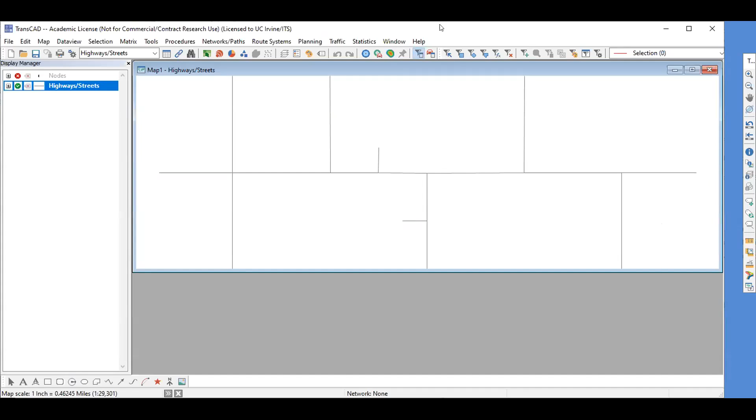Make a backup, click OK, and make the backup wherever you work on. Usually you won't actually use your backup. Excuse me? Yep. I have a question. When I try to open the file, it asks me if I want to make a backup archive and then update this database, or update the database now without a backup archive. So which one is it? Do I make a backup? Yeah, make a backup. I mean, most of the time you won't use it actually, because if you choose a backup and you're lost before you save, your backup still isn't saving anything.

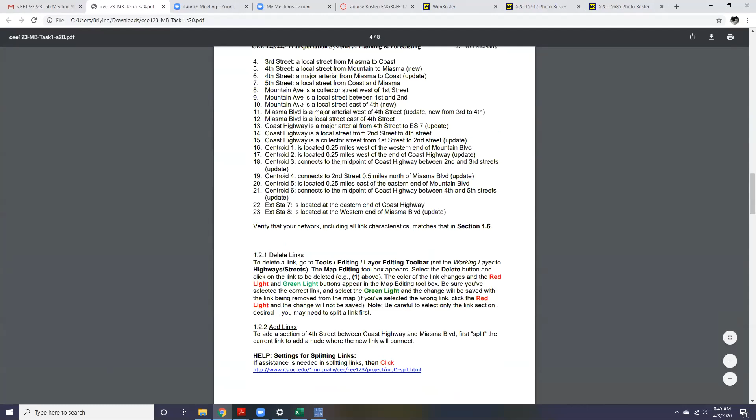Okay, so whatever I'm talking about, you can actually find it in the email I sent you yesterday. Here, sorry. So the email I sent you guys has those things to download. And for this task 1 S20, you should be able to see very detailed steps on how to use TransCAD, step by step, very clear. For this part, modify network, if you watch the video first and then do them very meticulously step by step, you should be able to find this map at the very end.

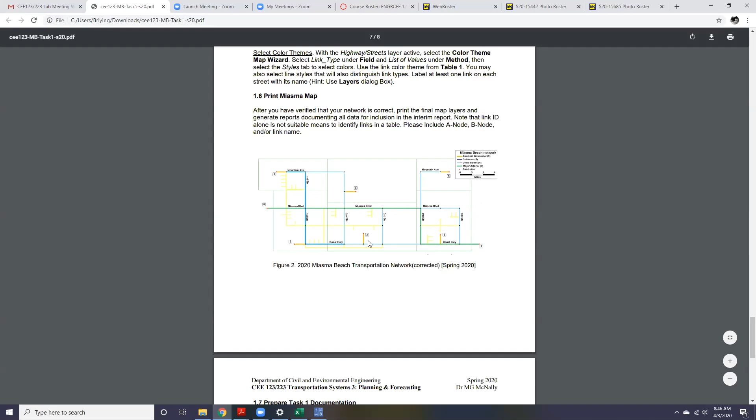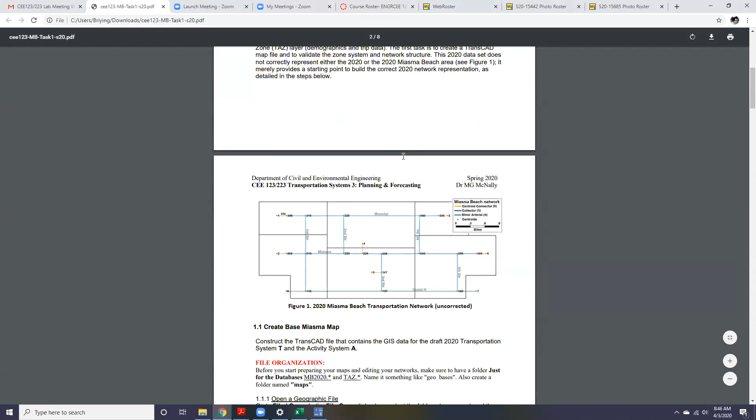Ignore the yellow link here. That's what the Professor added to make it more realistic, but the light yellow link we don't really need for this project. Okay, so we go back here and we can look at what the file says. What we did was open Miasma Beach. Oh, this should be 2010 right now because we didn't change it yet. Professor did that. Okay. And then we keep going.

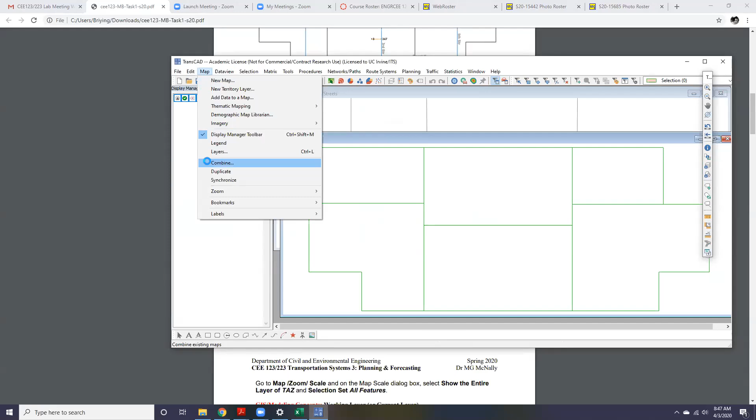We go File, we go Open, and we go to the TAZ layer. We make sure we open the DBD file, which is this one. We click Open, and you have two windows open right now. And then you need to combine those. So network and TAZ in this class always work together. I will explain later, or actually the professor's lecture should explain that. You click combine and you automatically see these two layers already here. You click OK, and they create another map for you.

See that, map 1, map 2, map 3. So you don't need the other separately opened ones anymore. Close them, close them on time. Make your screen clear every time. Remember that, or it's going to be a mess later on. So you have this map for your start already. And then what you do is save it as Miasma Beach 2020. That's actually Miasma Beach 2020. Before was the wrong network. This is 2010 now.

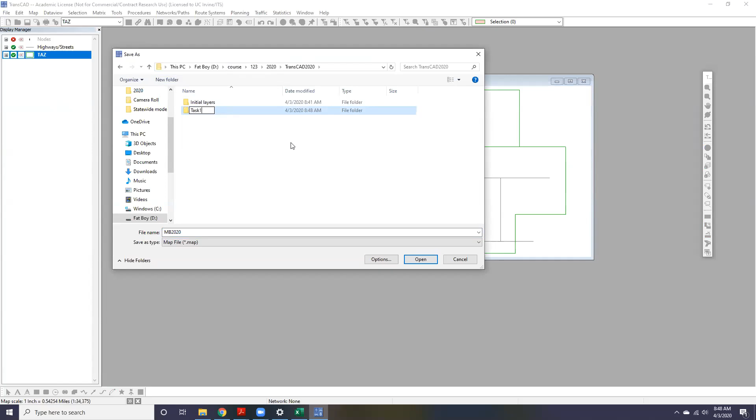So make sure you save it. Oh, sorry, my mistake. Make sure you save it in the folder you created. So this is task 1. You save it here. You click save. And when you close TransCAD, make sure you go back here.

And you need to go to initial layers and copy this to folder. Put it into task 1, which only has a map now. And later on, you copy the whole folder to task 2, task 3, task 4, task 5, and 6.

You don't have to do it because if you opened your map and didn't save it correctly, your work is still lost, or every map, every database you have here will automatically change. So it doesn't really matter for task 1 through 5, but it matters for task 6. So when you guys start to work on task 6, I will talk about it again.

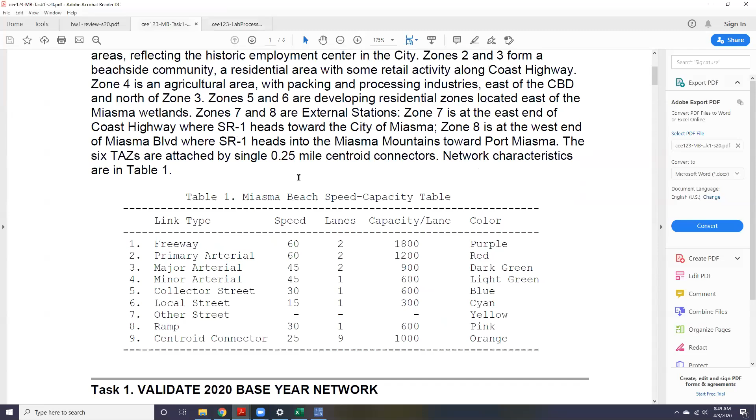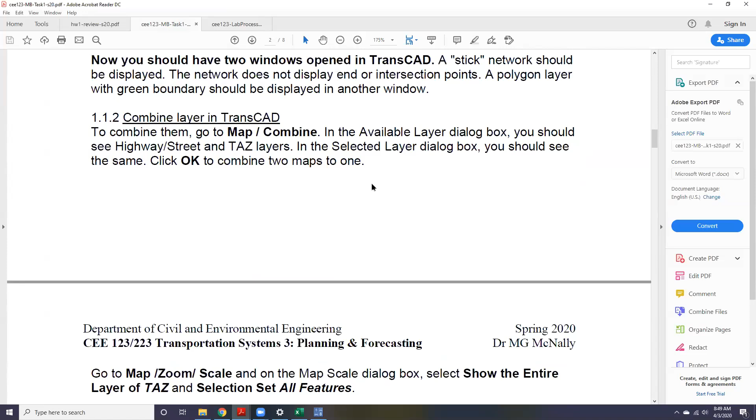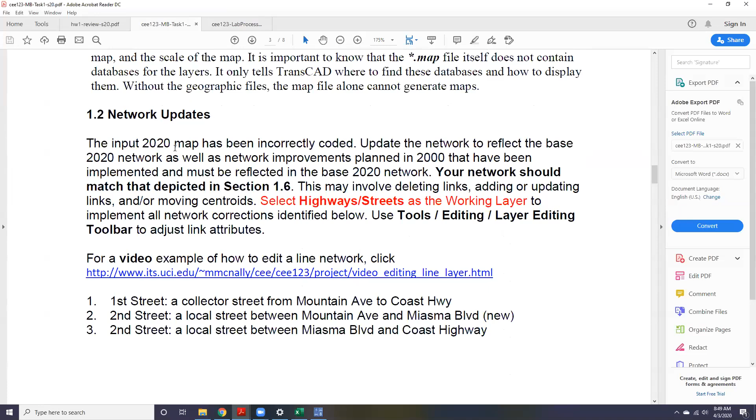So let's see what's happening in this task. So we are here. So we combine the layer and we have our first map now. Okay, so we're here. So now what we need to do for this week and next week, I hope you guys can finish it in this week, but that's quite a lot of work to do, is network updates.

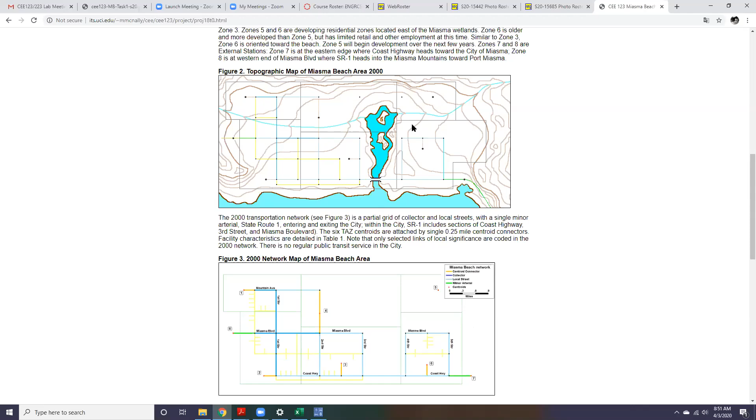And this is the topographic map for Miasma Beach. And we can see there is one natural area that is important for whatever you have in your alternative later, especially when you calculate the cost. So that means if you put a link across this place, it's tricky. If you actually did it, the cost calculation will be different, so that you know it.

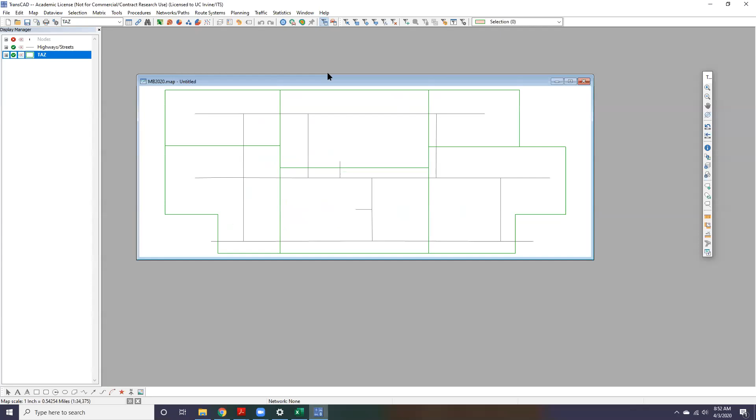And then there is the initial map for 2000. We are kind of making the change from here to the future. But actually the network provided for us is not exactly the same. You can see, let's see my TransCAD here. So if you open the professor's website, like what I did there, you can see the difference. Here is already a link, which is not right for even this project. So there's a lot of modification you need to do.

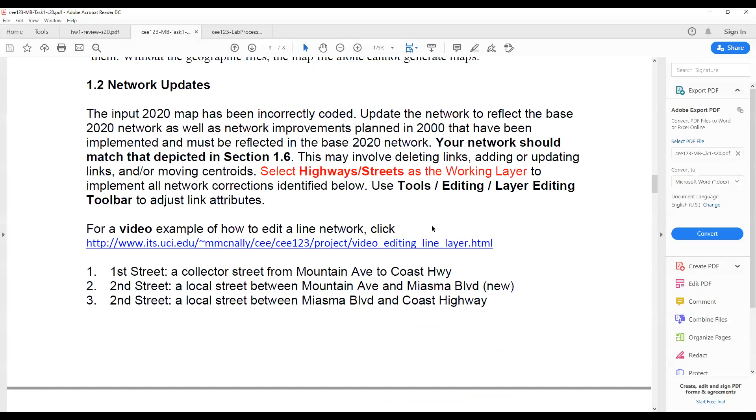So let's go back there. Miasma Beach project. You will see this table, little table, which is the same as this file I gave you at the very beginning here. You can see this table. So we called it speed capacity table, but it actually has more information. This is a link type. This is a lane number.

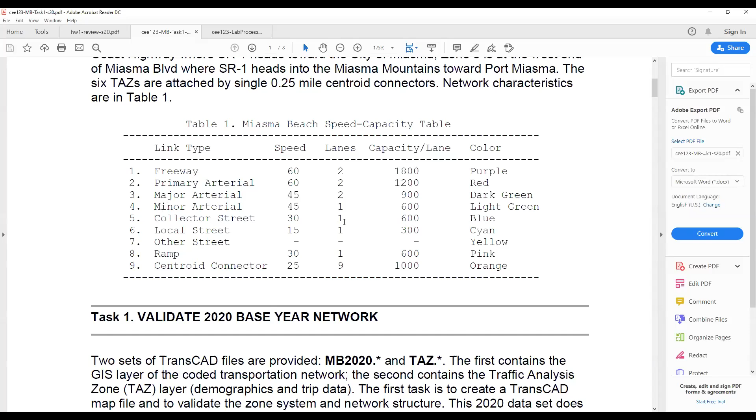So capacity per lane is not going to be the total capacity for a certain link. The lane number times capacity should be the total capacity for a link. We'll use it later on. Your definition of the link type is very important for your project. When I say you change some link to collector street, let's say that, that means you need to change your speed, your lane number, your capacity all together.

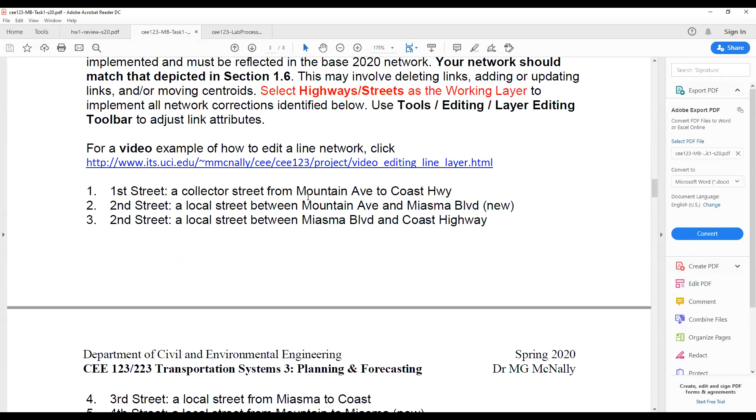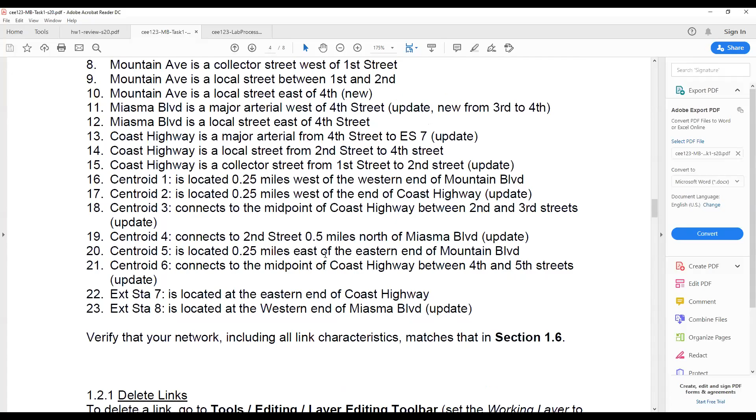Okay. So now we focus on TransCAD. The first thing you need to do is activate the node layer. So you can see when I push this button, you can see some very light gray dots displayed on the map now, right? That's because this layer is now active. So to make it clear, click.

Would you mind if we record this part that you're showing us on TransCAD? No, I don't mind. Do you have that option? It says I need permission. Okay, let me see.

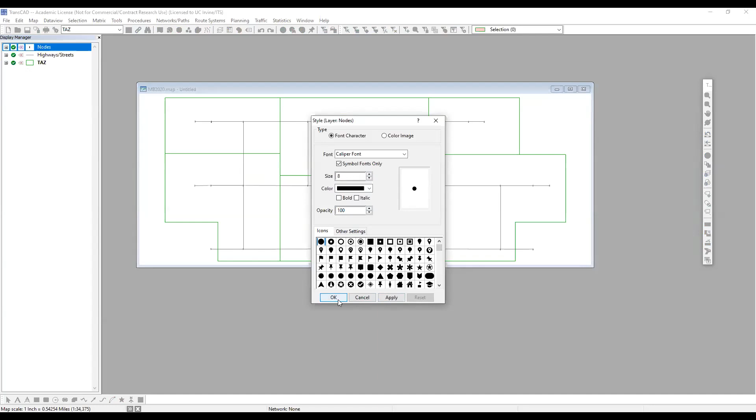Here. So you want to make a node larger. Click this little figure here. You can change a highway. You can change a street. And if you click here, you can change the TAZ layer. So same way, you change node, you make it color black, you make it larger. Make sure you use dot. I mean, you can use others, doesn't matter, but I would always say dot for node is better. Here, very big.

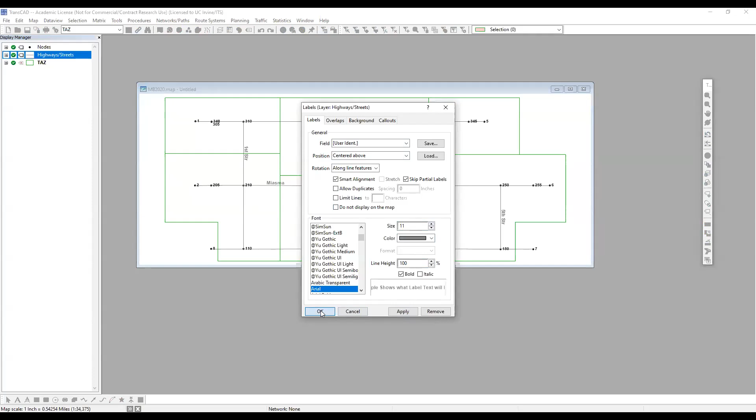Okay, it's clear. So now we can also label it. This is this little button here. You can go to ID, apply. So now you can label also street. We want street name because Professor Phil is talking about the street name every time. Apply. Make it clear. Okay, that's how you do it. Any question? Okay.

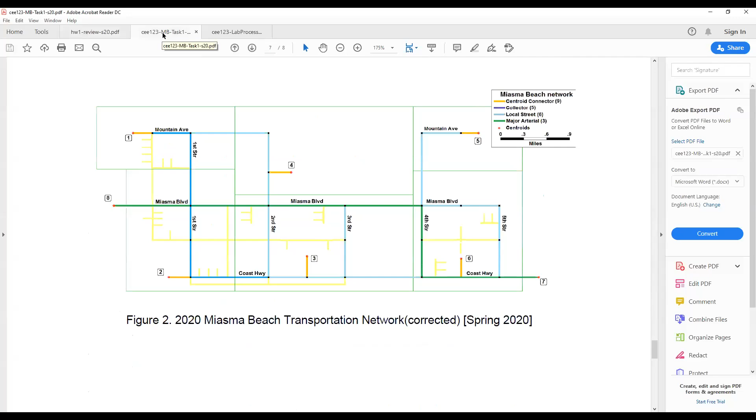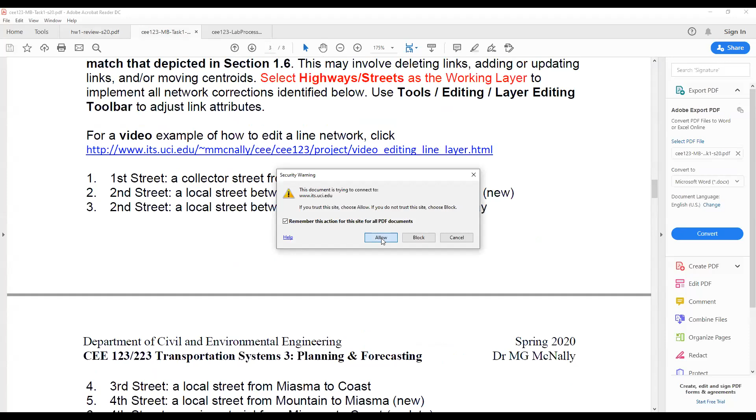Okay, so now we can go back to see what the professor wants here. Wait. Let's go back. So feel free to use the link. This is actually very useful. If you watch the video, he will show you again and again as much as you want about how to change link node. You can see that anytime you want. So right now I'm gonna show you how to modify those links.

So go to the right layer because we're modifying network, not TAZ layer, not node. So right now you go to the working layer, highway and street. And then you go to tools, editing, edit a layer. What is that? I don't know. Layer editing toolbar. This is pickup link. This is add link.

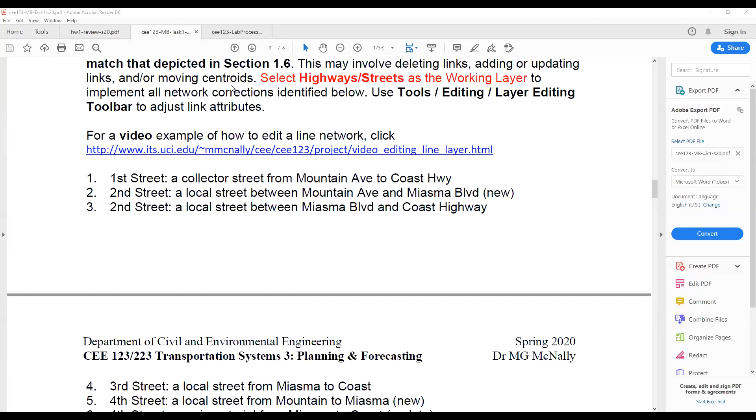We can't see what you're doing. All we see is the PDF file. Oh, okay. Sorry. Can you see it now?

Yes. Okay, cool. So now this button is to modify link, but it's not very accurate. This is the one you pick up link. This is add link. This is delete line, join links, split links, and those about the information. I'll show you how to use each one.

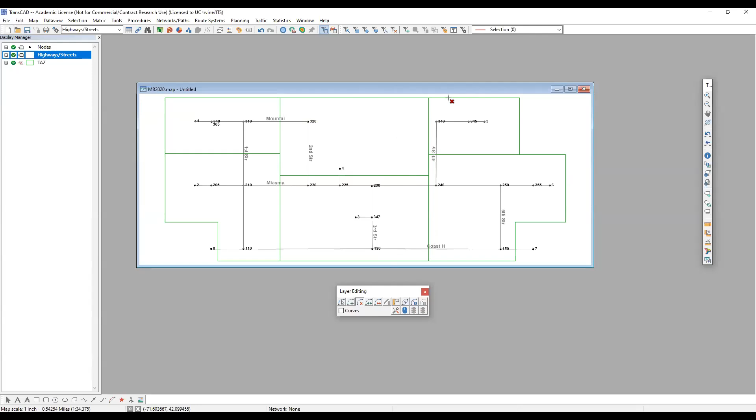So first of all, we all know this link didn't exist in the final map, right? So we pick up this link. We want to delete it. Select it first. Click on the link when it's turned red. Click this green button. Sorry. Okay, so let's do it again. Pick up this link. What we want to do is delete the link. It's turned red. Click the green button. It's disappeared. See that? That's one.

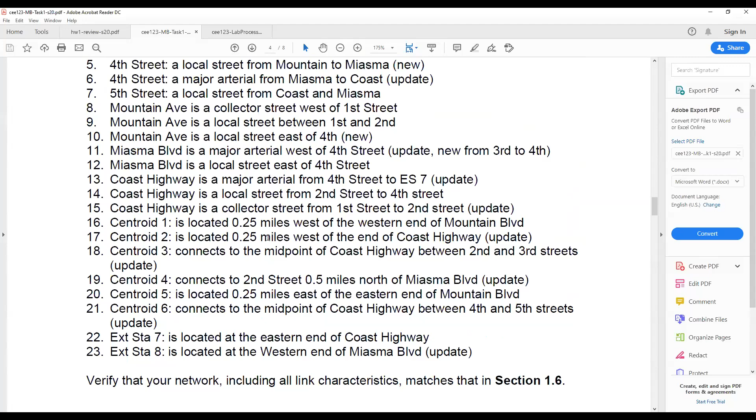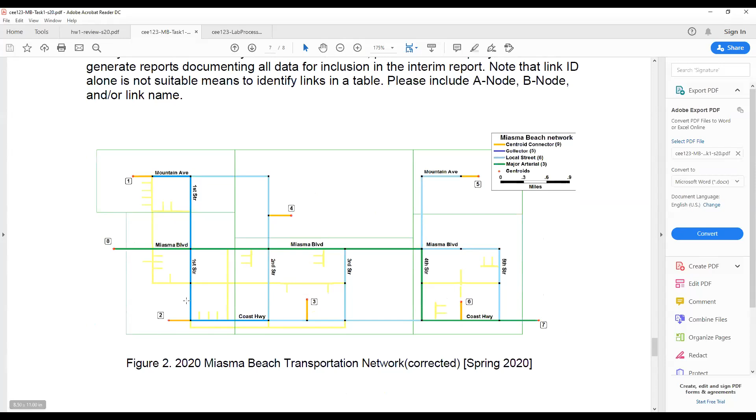So we can also see, hey, is my screen sharing paused? Okay, let's see this. So let's see, Centroid 1 is located where we were, and Centroid 2 is an update. So we can see final map says Centroid 2 is here. And in your TransCAD right now, your centroid 2 is here. So you want to move centroid 2 to this spot, and right now it's centroid 8.

So moving centroids is very, very different in this lab work, in TransCAD or wherever you're going to work in the future if it's related to centroid moving. Because centroid was given by TransCAD, it's already given by node. The node number will change automatically out of your control if you delete a node and add a node. However, for centroid, we need it to stay with the centroid number.

So we don't want to, like, if I connect those two and move something, you will lose this number 2. So what we need to do is move this centroid from there to here. And then we connect them by this add link from here to here.

And you will still have this link right here, but right now you can push enter. See, if you do that, you push enter, otherwise your node will drop somewhere else. So now we use cancel edit. The whole thing you made here is all canceled together. So let's do it again.

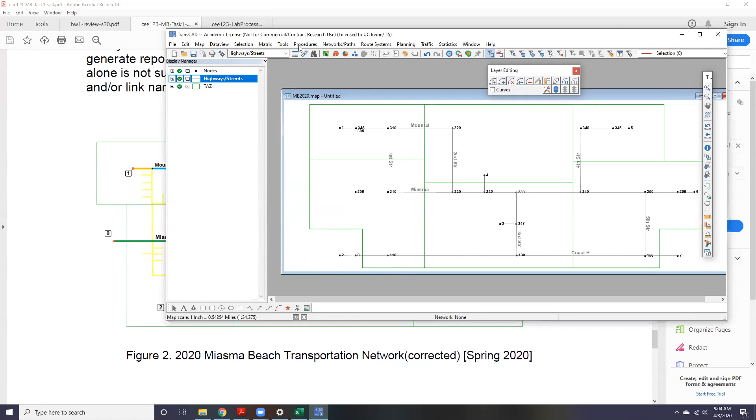So now we don't need 2 and 205 connected. Right now we do the same thing to delete the link. We pick it, choose delete link, click it, and click green. So now you have 2, 8. You have centroid 2 moved down here. And you can see 2 is connected with the whole network with this orange link.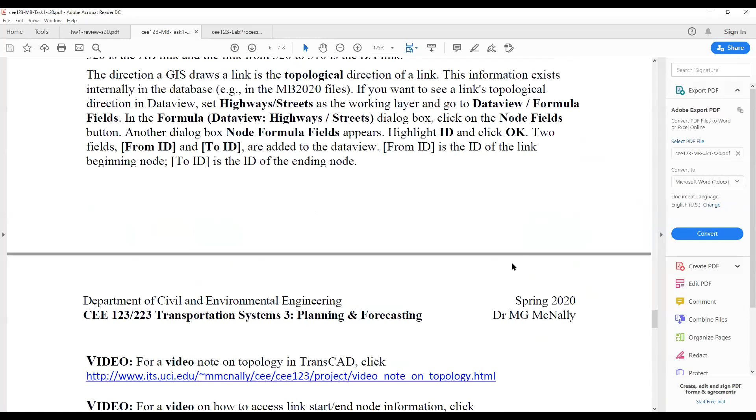What is the orange link? You should go back to the file at the very beginning I just showed you. Okay, here. What is orange? Centroid connector. Did anybody remember what the Professor talked about centroid connectors? He mentioned it very briefly. So a centroid connector is not real. A centroid connector is an imaginary link. You can see.

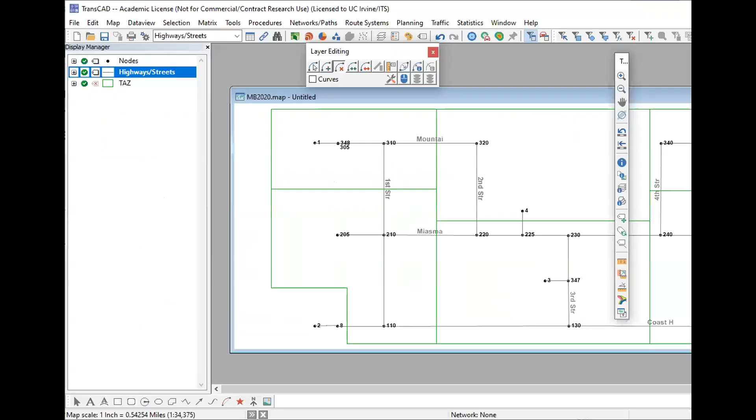If you delete the link wrongly, sometimes it lets you recover, sometimes it doesn't. So you go to edit, and if it allows you to undo, you can do it. Sometimes it just doesn't work, I don't know why. If you click undo, it's gonna ask you, do you really want to do it? You click yes. So that's how you do it. And you can also redo like this.

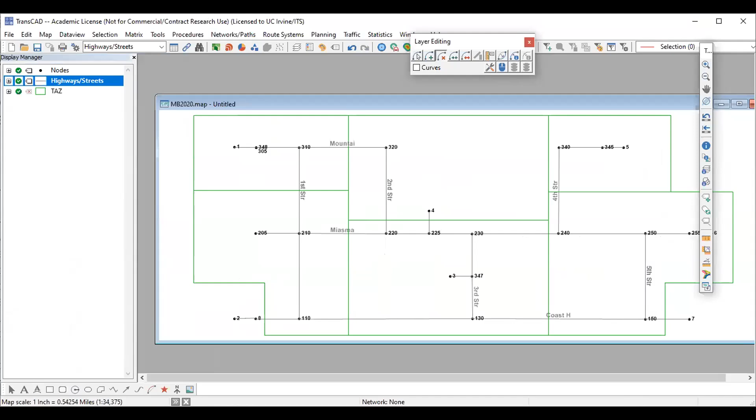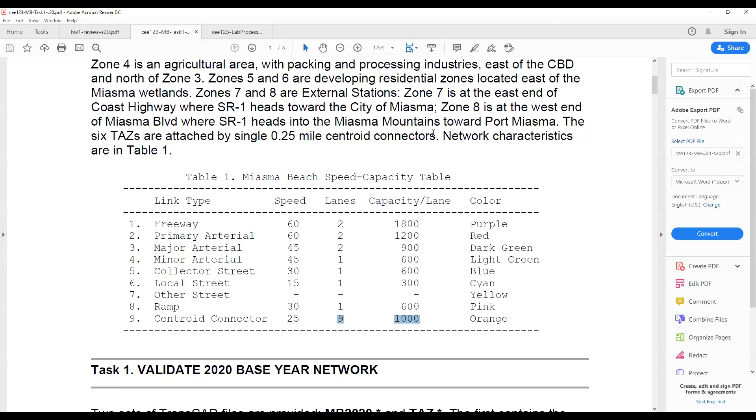Where was I? Here. Centroid connector. It's not a real link. The capacity and the lane number together give 9,000 capacity. So you know why it's not real, right? Why we need it is because when we have a network and we have TAZ numbers, the system will not know automatically which node represents which TAZ number. You need to make them match.

You need to connect the TAZ layer and the network layer, which also means you need to load your TAZ's travel demand to the network, and you need a connection between them. So that's why centroid links exist. They connect the TAZ, which is this 2, to the whole network. Is that clear?

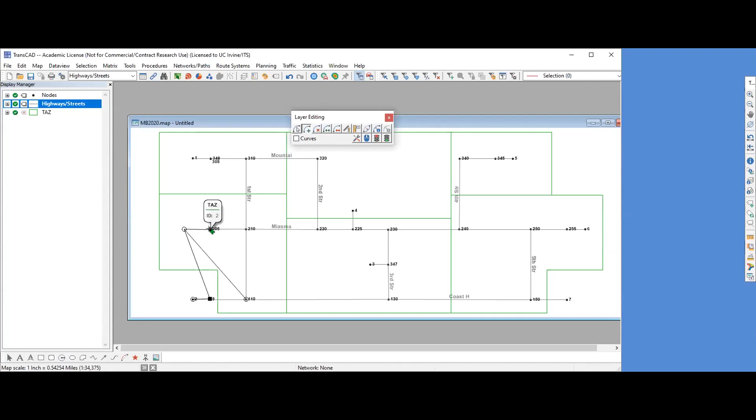So let's finish our work here. We see 2, 8, 110. And in this network, 8 is here, 2 is here. So what you do is you move 8 there, and you connect 8 with 205. You click enter, and you save it. So now 2 is here, 8 is there.

Well, actually, you can do 8 first. That would be smarter than what I did. And then you can connect 2 with 110. And you just delete all the links you don't want. And you can also make it shorter, make this longer, just as you desire.

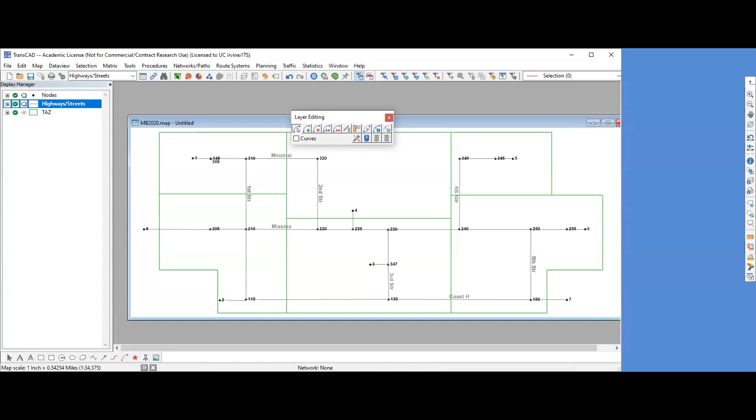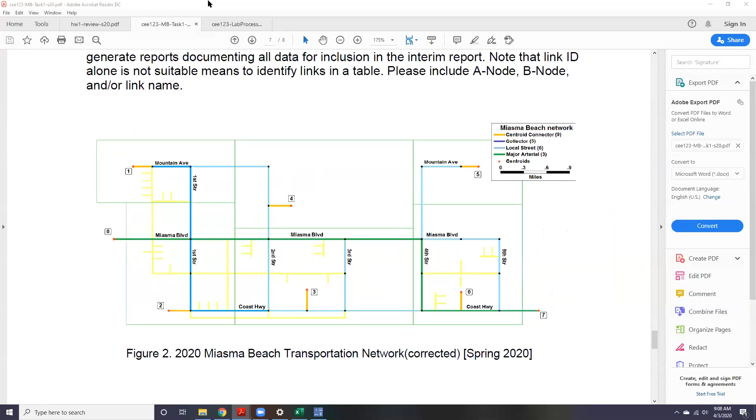So let's go back to that map again. You see 8 sticks out, 7 sticks out, 2 is inside. Remember what we saw in the prior study? In the prior study website, where's my website? Here. Are you guys seeing the prior study now? I assume you are. Okay. Prior study, you can see this one, this one.

These are outside. So this link and this link are external locations. They are different from all the locations inside the study area. They connect trips from outside of Miasma Beach to get into Miasma Beach, and from Miasma Beach to go out of the study area. This also includes trips from outside to outside. So you will have 3 parts for external trips, all linked by these external locations. You will see later in this project.

Okay, so now let's go back to this PDF, which has the final map. I've showed you how to use those tools. You should be able to do it step by step to make your map look exactly like the final map. Link modifying. Okay, I'll show you how to change the link attributes. So let's stop the editing here, and we need to go back to... Can you minimize the PDF again, please?

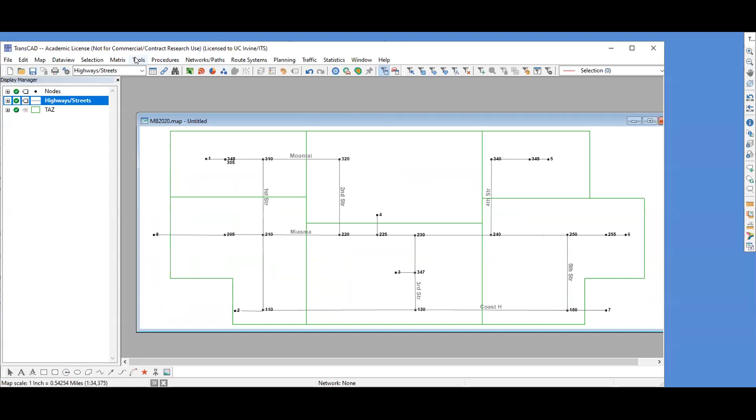Oh, sorry. So, in TransCAD, okay, so what I did was I just closed the layer editing. I closed it, that's all I did. Any question? How did you add the street names and the numbers for the nodes and stuff?

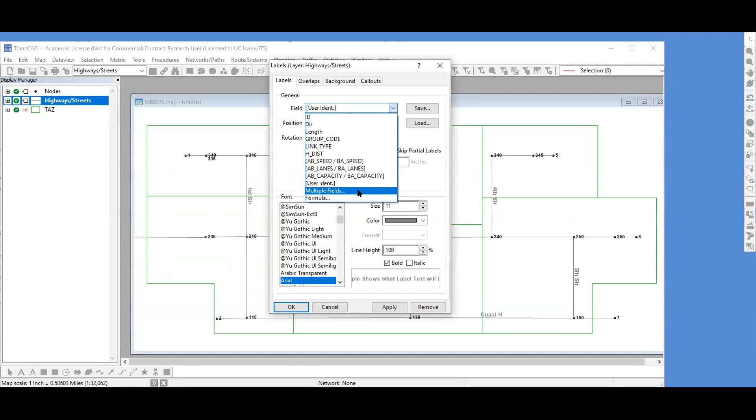Look at this. And you can change whatever information you want. You can even add multiple fields. But be careful when you add multiple fields, because they're not going to automatically give you a legend. So for example, if you add length and speed together, it will let you choose color 1 and 2, which you don't really know which one is which.

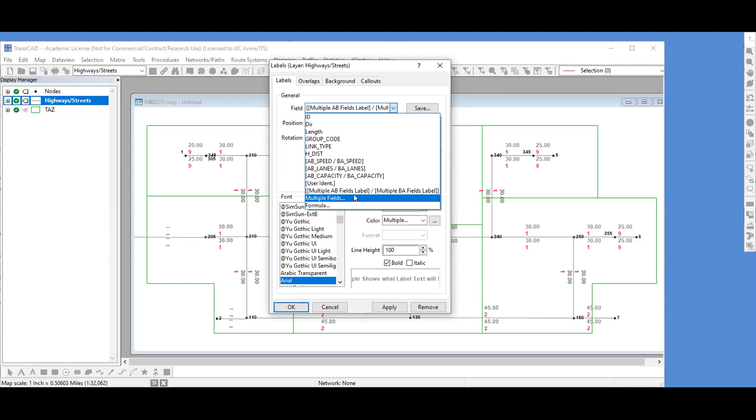And then when you apply it, you will see one is gray, one is pink. So the problem is sometimes those numbers are very different, like length and speed — if it's on a scale of 30, 20, it must be speed, and if one is 1 to 9, it must be a lane number. But it's not usually the case. Sometimes the numbers are really close, and sometimes you need to compare the old speed and the new speed. It's confusing, so I don't really recommend you guys use this. But if you use it and label it correctly, it's very useful. That's up to you, how to use your map, how to treat your map.

Okay, so we remove that, and we put User Ident.. You can see it, right?

So how to look at those information is very easy. You can go to data view. Here, this is the little button for data view, where there is a data view. I recommend you use this, and always be very clear about which layer you're on. If you're on the TAZ layer and you open this, it gives you all the TAZ information you couldn't see on the map, but you can see it in your data view.

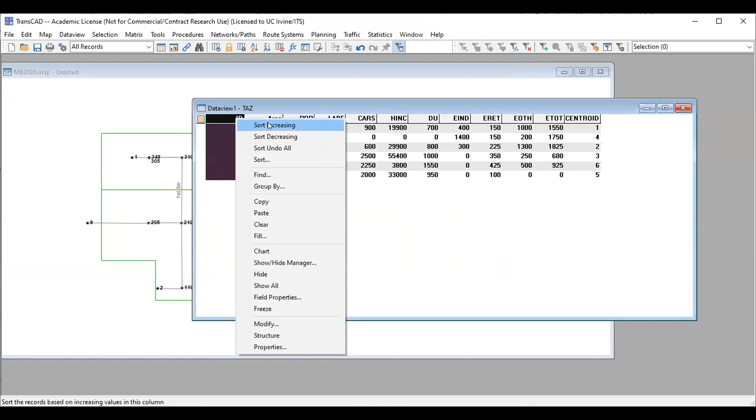And somehow this TAZ is never in order — I don't know why it starts from 1 and then goes to 4. So every time you try to modify this, remember, make it in order. It's very, very important, because if you didn't do that and you do something in Excel — we're going to have some task working on Excel, not TransCAD — and when you copy things back, it's always wrong. A lot of people make mistakes from that, believe me.

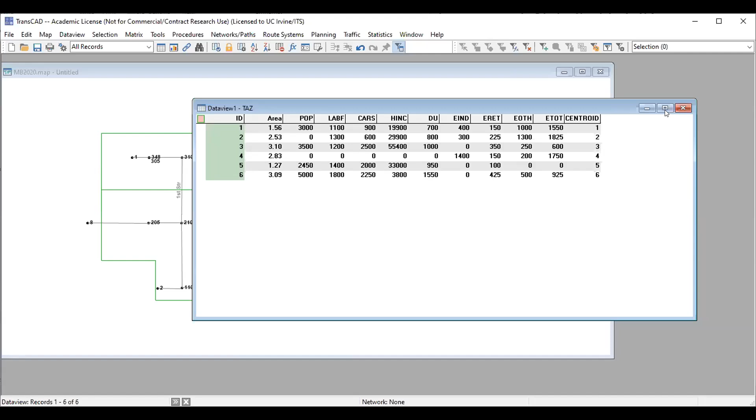Now go to street, you see the data view. Because we just modified the link, you will see this blank. You can change the number here very easily.

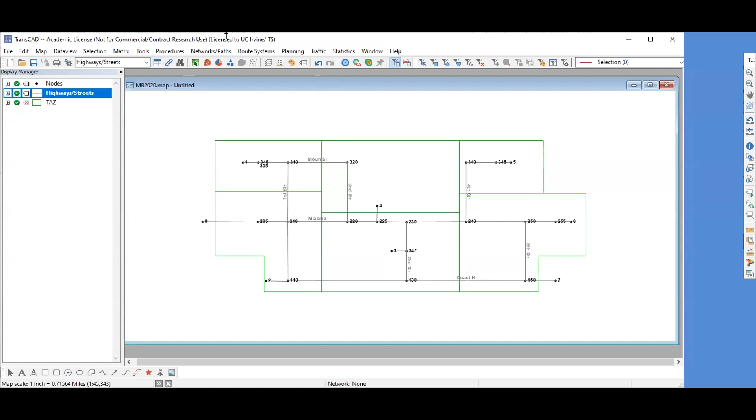However, I recommend you change the number in some other way. So what I showed you was how to use this toolbar, editing, go to layer editor — this button, how to use that. And here I'm going to show you how to use this button, link attributes. What I just showed you was link attributes. Those are attributes. If we talk about network attributes, I mean capacity, type, distance, speed — all of them together, they are all attributes. So you have several attributes.

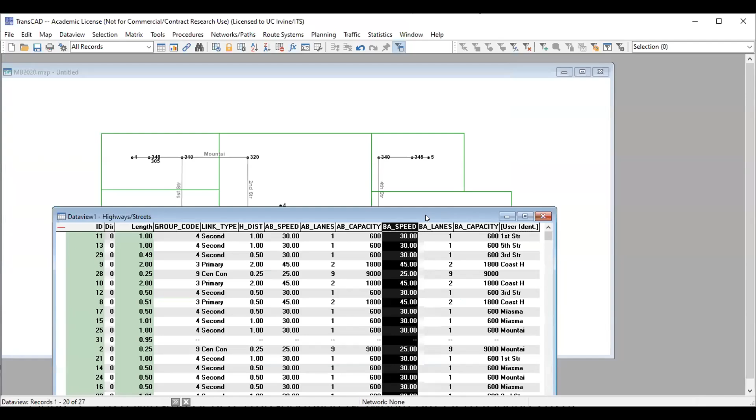You have directions here. TransCAD works this way: you see AB is from node A to node B. If you see BA, it's from node B to node A. So for example, if I show speed, up and down, it's going to show 2 numbers. Which one is A to B? Which one is B to A? Anybody have an idea? No?

So in transportation, A to B is always here, below, or on the right — it's always A to B. And in TransCAD, if you see here, AB and BA is always automatically assigned by TransCAD.

We will explain that later when we have flow. But right now, when you change the AB speed, you also need to change the BA speed together. My recommendation is you change one side, copy it, and paste it to the other side, so you won't make a mistake.

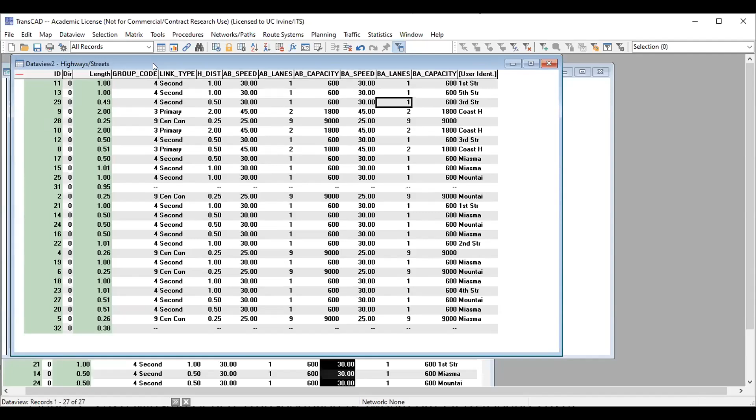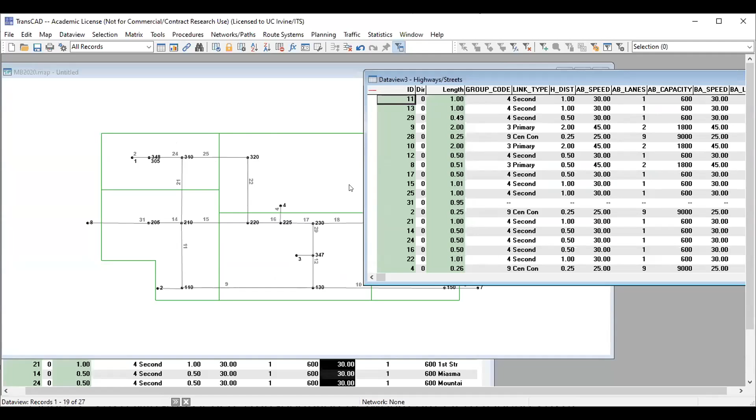Right now it's kind of blind - you don't know which link is matched with which link on the map. So there's a couple of ways to do it. One way is we can label the link ID. If you label link ID and open this view, you can see which link you're working on. So if you're working on 24, you go find 24. That's the link you're working on, but that's not the best way, it's just a way to look at it.

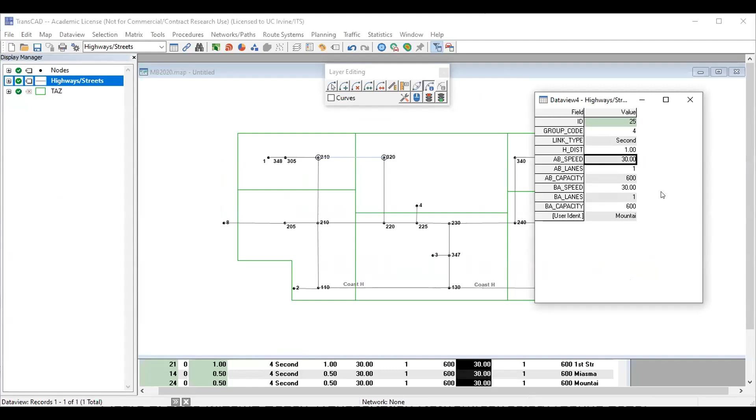Another way is to use this button, Edit Link Attribute. You click this button and it gives you a small window telling you this link is 25, with link type and all the attributes here. You can just modify it - if you want to change it to 15, it will change to 15. There's still a button to save it or cancel edit. Remember to save it every time or it won't happen.

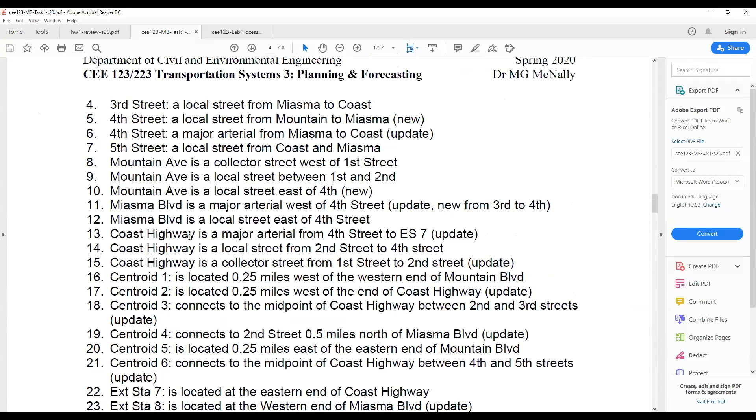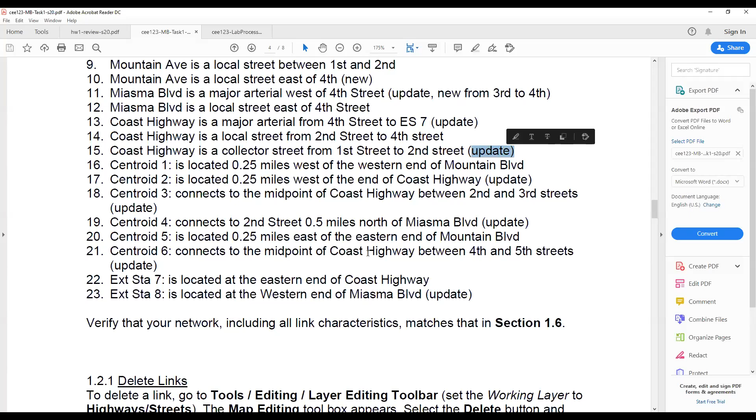Any question here? So that means if the professor's task says change something to something, or update, that means you need to change maybe not only the link, maybe you need to change those network attributes. And that's part for link. Any question here?

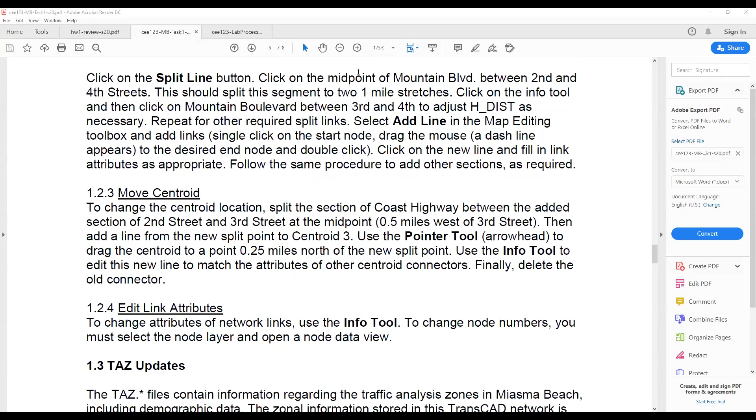Any question here for now? No, okay. So you can also see the color here - in the fill you can see the color. I'm not going to show it now, keep switching is a lot of trouble.

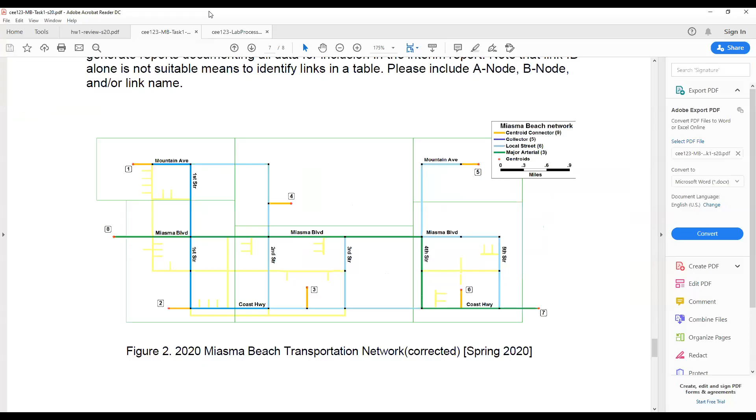One way to do it, please open - I'm saying you can use your computer to do this, to just look at this final network, which is not a secret. So if you can open my tips, I'm gonna show you the tips which I have here.

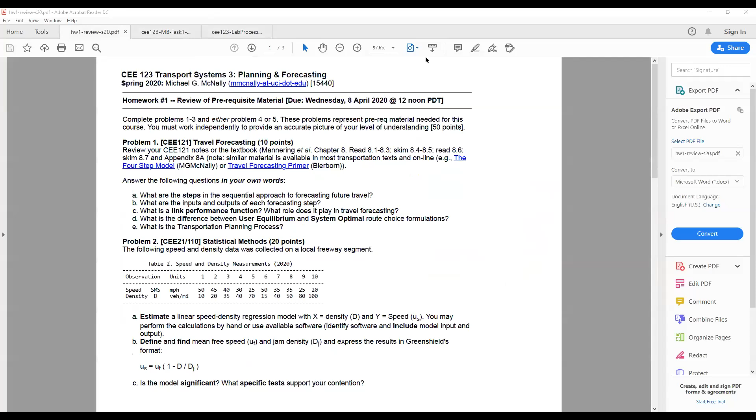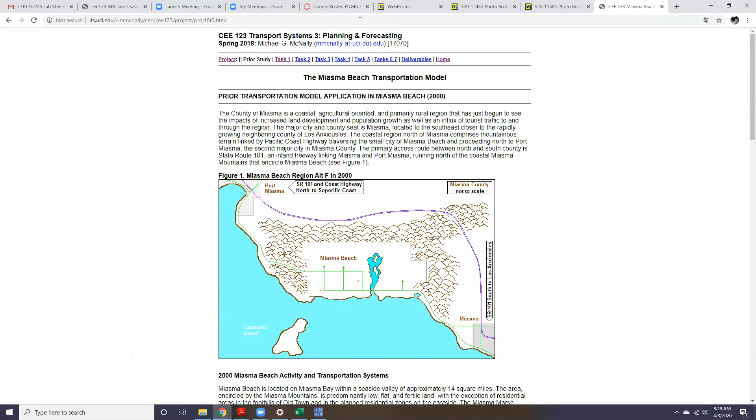Oh, I need to go back. Are you seeing this? Are you seeing this? Okay.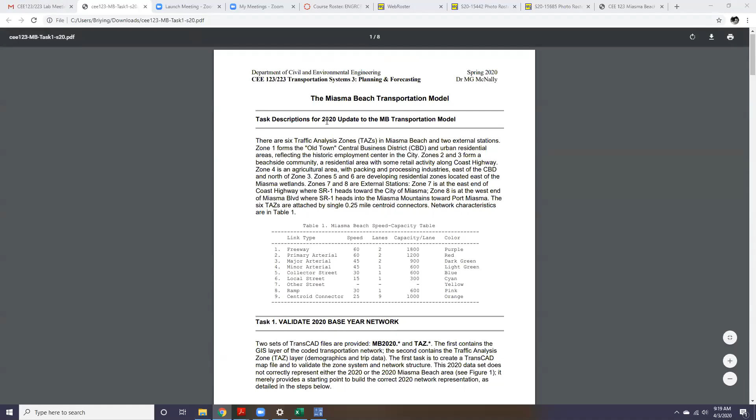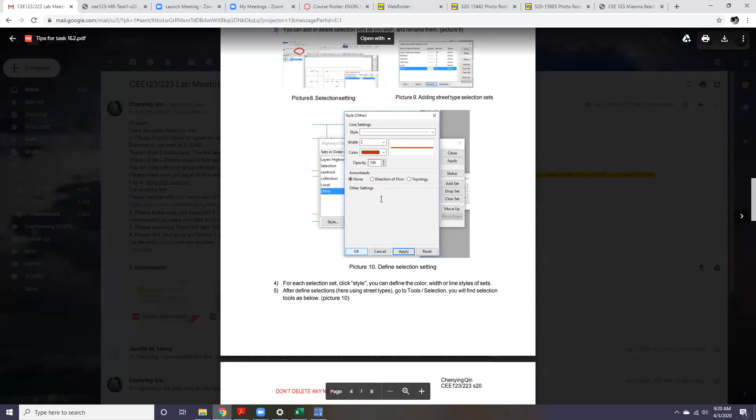Okay, so here is my tips. It's what I sent you yesterday as well. If you go to the third part, it's use the selection style editing tool, and you can modify the color and the style of your link in your TransCAD. Just follow the instruction here, which is very easy.

Here, let's go back to TransCAD. So there is a little plus mark here. If you go to that, you can see sets, and this is a selection automatically assigned for your project right now. But you can always go to selection setting, because you're on highway street layer active now, so it's going to open this set for you.

If you change your active layer to TAZ, you go to selection, it's going to give you TAZ, same way. So you go to selection, you go to setting, and you can add a set. You can say this selection is major - you type major here and it's changed to major. And you can select this to be dark green.

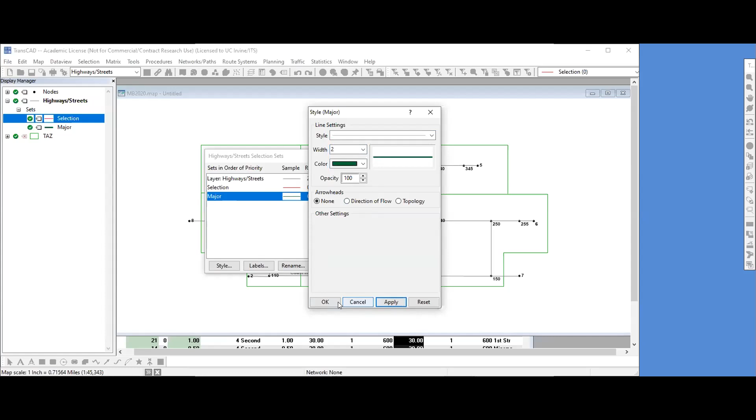Doesn't matter, okay. You can also change the style to other things - I'm not recommending it, please keep the same as whatever we have there. And you can change the width to 2. So right now it says record has 0 because you have nothing put in the selection.

There's a couple of ways to work with selection, it's also in the tip. For right now I can show you how to use it. So your selection toolbar is already opened - mine is already open, I'm not sure about yours. If it's not open, select the toolbar and you will find this thing appear on your screen. So here you can choose which selection you're working on, and here's all kinds of tools.

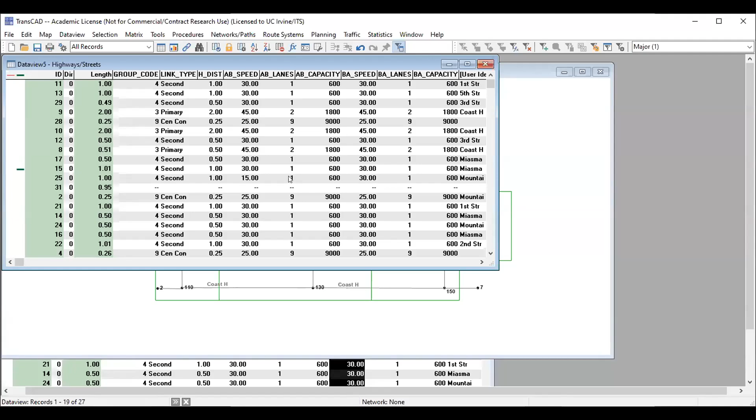Select by rectangle, select by circle, select by shape, and select just by itself, like what I'm collecting on - by point, if you point this, it's going to be major. That means you put your selection here. You can see the selection setup here - that means you put this link into a certain selection. It will not change your attributes, it will not change your network. That's one way to do the coloring mask in TransCAD.

So we drop it, clear selection - you lost everything. I'm not sure if you can just go back. See, you can go back to undo geographic editing. Let's try - no, so you can't go back to selection. If you lost your selection, you have to redo it.

Okay, so that's one way to do it. Another way to do it is use this

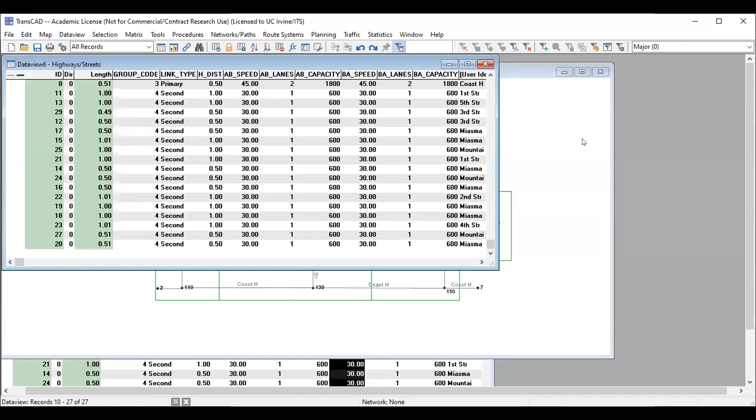color theme. Remember what you have now is a bunch of wrong link type and wrong network attribute. We're just having an example here. See there's a group of centroid connector, and primary, secondary, which are not in the final map, but here we use it as an example.

Click this button. You can decide which field you want to use your colors in. For that, it's link type. This will automatically give you those, which you can change, like color combination or whatever you want to do, and you can go to style to edit it.

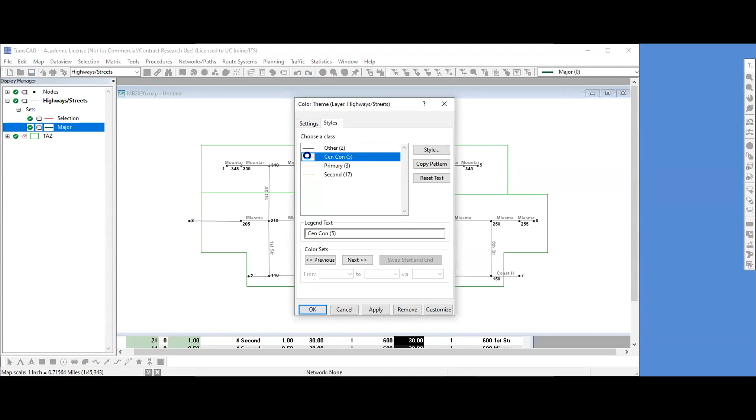See, the number here is the number of a certain type of link you have in your TransCAD right now. You can change it to orange. Make it 2. Apply. Okay.

You can change it to an ugly color or a beautiful color, whatever you want. Try to keep them all the same width, or your network will be really ugly. Secondary, purple.

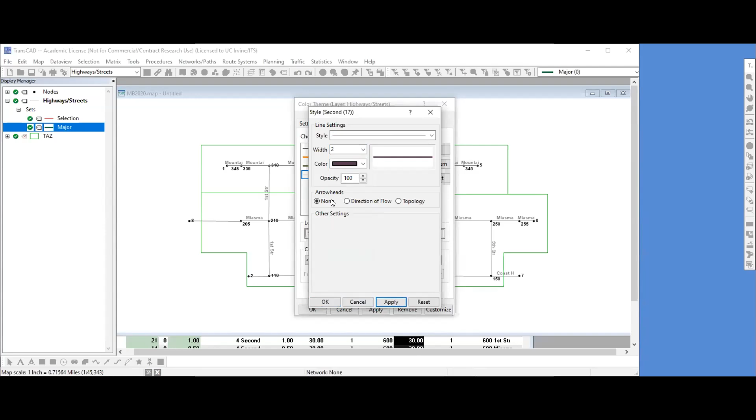So you see those arrowheads. You don't need to change anything here, but if you change it, it's going to give you the flow direction, which we don't have flow right now, so we don't use that.

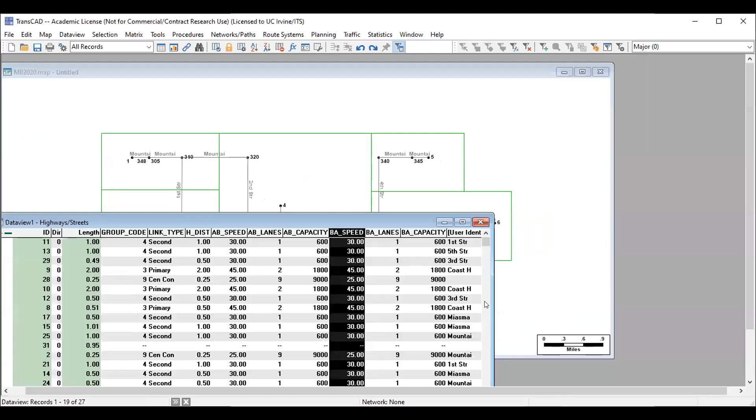You apply. Now your network changed. So if you want to use the color theme, what you can do is modify all of your network, make sure everything is right, and change the link type. Then you can use this button to make the change on link type and go to style to modify it again. Easy. That's another way to do it.

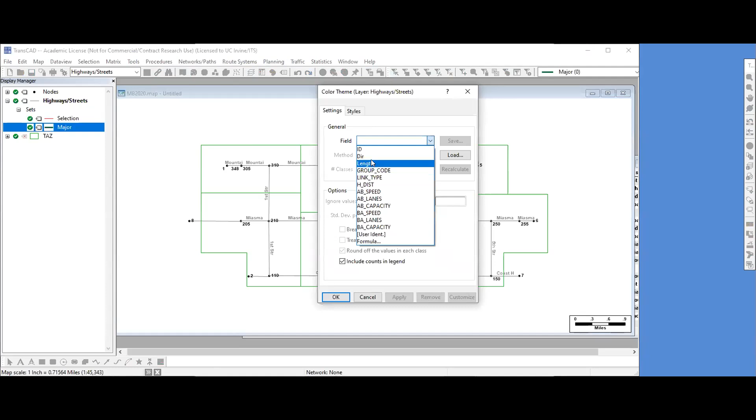Keep it in mind, there are two ways: use selection, and use this theme map, this color theme map. The color coding here are in conflict, so if you pick one way to do it, stick with one way. If you have selection and you also have color theme, the color theme will actually just automatically create another set. Like we can have it here.

Okay, so see, let's have another set, and that's your color coding of this theme. And for this theme, if you have it, you have it. You have a little button here, the green button, that says 'I'm active.'

If you want to close the active button, the active selection, you can just do this, keep changing the status. If you change it, it will change to invisible, and then inactive, and then active. So if you decide you want to use selection, you keep with selection.

If you want to use this, use this, because if you put them together like this, it's confusing. It's like this link is in this group says I'm a major, and also in the other one it says this light color is a secondary group, and one will mask another. So stick with one, don't use both.

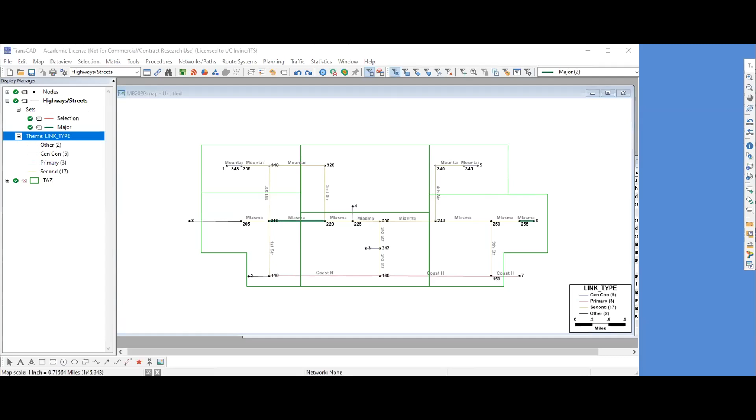You will find how to use selection, like I said, in the tip I sent you. That's the third part of the tip.

So, anything unclear? Any questions for now? No? Okay. So what I want you to do is download everything I give you every time, the first time,

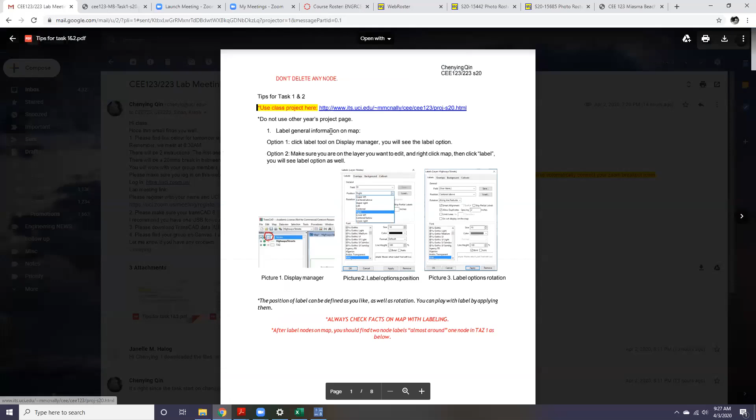and keep it wherever you have the class folder on your computer. Make sure you read through every line, especially for the tips. For task 1 and 2, there's some very, very useful information if you read through it.

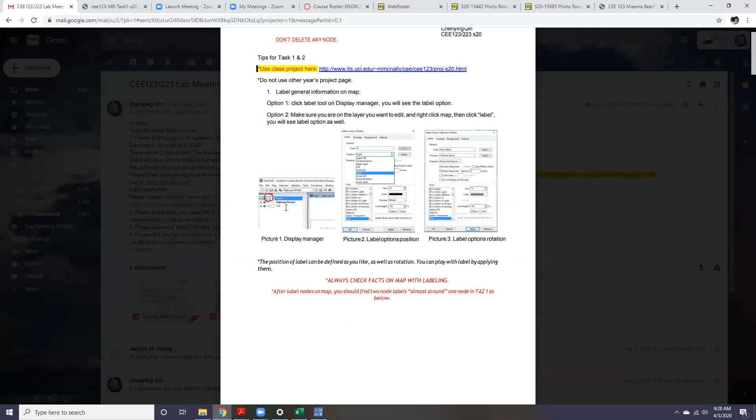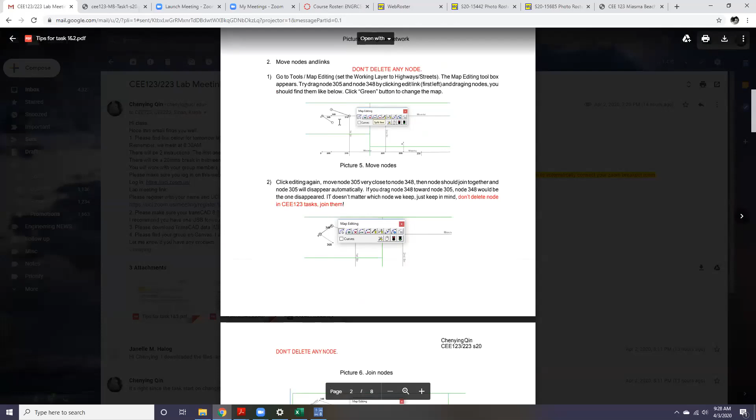I marked everything very clearly here about this, starting from how to enable the node layer, and then there's something you need to modify. You just need to follow this instruction and change those two nodes, put them together, make one of the nodes disappear,

because if two nodes exist like this, like the original what we have right now, this zone, this connector is not connected to the whole network. You will have a problem later on. But if you have a problem later on, you need to go back to task 1 to fix it. Well, you already lost a point, that's the first, and you will have a messed up network result. Like this